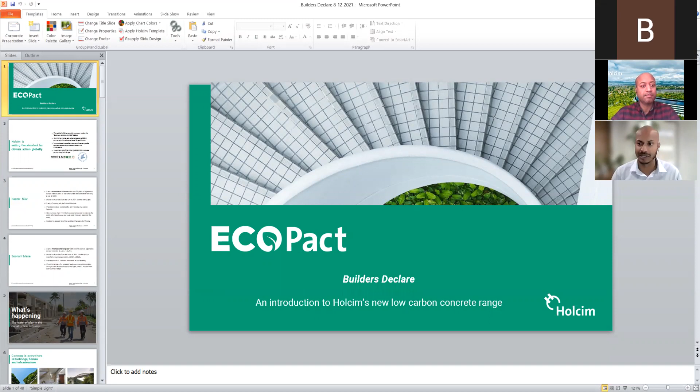Thank you very much, Hamish, for that. And thanks everyone for taking the time to join me today and Sushant in presenting ECO Pact and the offerings that we can present through ECO Pact at Holcim. Without further ado, I would like to give a quick summary of what Holcim stands for.

Holcim is the first global building materials company in the world to pledge to the 1.5 degree reduction, or committing towards that, as well as achieving net zero emissions by 2050. How we achieve this, we are targeting this through science and data-driven initiatives, which are verified and certified as well, so that we can peg ourselves and work towards achieving this net zero ambition that we have. Holcim has also invested over 160 million Swiss francs towards this, which is equivalent to $220 million so far, to reduce our carbon footprint in Europe.

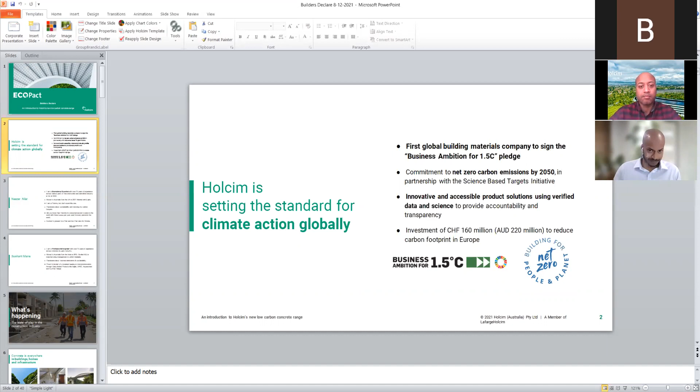Well, I'd like to give you a quick introduction about myself. I am actually a biomaterial scientist. I qualified with my degree in London from Queen Mary University. I migrated to Australia in 2007, and ever since I migrated here to Australia, could never break into that market. And I was fortunate to get into the civil construction industry.

I've got over 15 years of experience in various different roles in demolition and the construction industry, from concrete to quarries. I'm married with 2 little girls. I am a Pommy, but don't sound anything like it. Very passionate about sustainability and reducing my personal footprint as well.

As I mentioned, I've got 2 little girls, and it saddens me at the state that we're in and what we're heading towards. So working for a company like Holcim really does invigorate me, knowing that I'm doing everything I can to push this and try and get everyone on board and do our parts in every little way that we all can to contribute towards this.

And as Hamish has alluded to earlier, 3 tons of concrete are consumed per person on average, and it's only second to water globally. So that puts into perspective how much concrete is consumed, and hence why I'm very excited to talk to you about EcoPact and EcoPact ZERO and the offerings that we have available for you right now in Victoria.

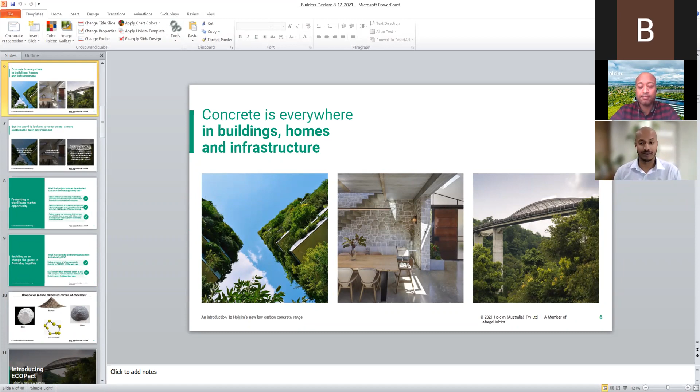So what's happening, the state of play within the construction industry? We know concrete is everywhere. It's a beautiful material to play with. There's so many things that can be done with it. It's such a versatile product. But at the same time, there are lots of different things that are coming into play with regards to how we are looking at making concrete sustainable.

Green Star is looking at targeting and reducing the carbon footprint by 40% in 2030. There's a new standard that will be coming out called Green Star Homes, and all the various state departments from New South Wales to WA, VicRoads, Main Roads in Queensland, they all have their own standards and work methodologies that they try and support financially to incentivize people to be more sustainable and more conscious in how they go about building infrastructure and so forth.

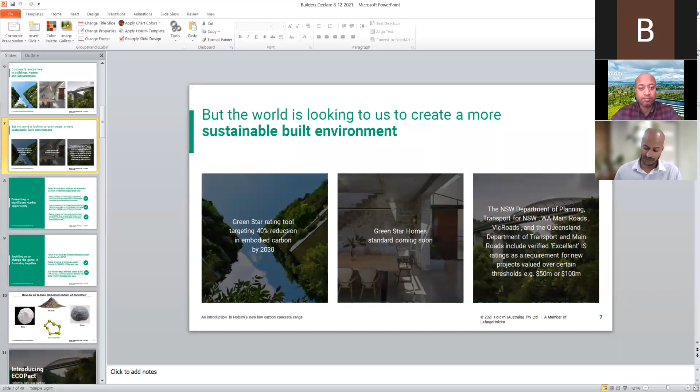I wanted to give you a bit of context with regards to how much carbon we can actually reduce by reducing the embodied carbon in concrete. Concrete is a very carbon intensive product. We know that from all the GP Portland cement that is consumed within the concrete matrix. So to give you some examples, if we were to reduce the embodied carbon by 60% in an average house slab, that equates to about 15 tons of carbon. That's equivalent to a household's carbon emissions for close to 2 years.

To put it into a different perspective, in an infrastructure project with about 150,000 cubic meters of concrete, if the embodied carbon was reduced by 60%, we're looking at about 44,000 tons of carbon that is removed, or the equivalent of 23,000 cars off the road for a year.

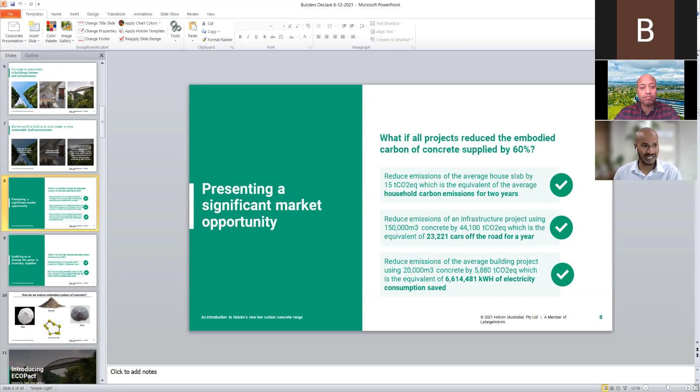The same could be said for something like an average build of 20,000 cubic meters of concrete. If the embodied carbon was reduced by 60%, we're looking at about 6 million kilowatt hours of electricity saved in terms of carbon emissions, which equates to about 5,800 tons of carbon. So as you can see, these all stack up pretty quickly, and hence why I'm very excited to talk to you about what EcoPact offers.

In Australia, if all the concrete that's consumed is reduced, that we actually take a stand and reduce the embodied carbon by 60%, that's close to 8 million tons of carbon that we could remove or reduce per year. EcoPact can reduce the embodied carbon between 30 to 60% compared to the Australian National Life Cycle Inventory database.

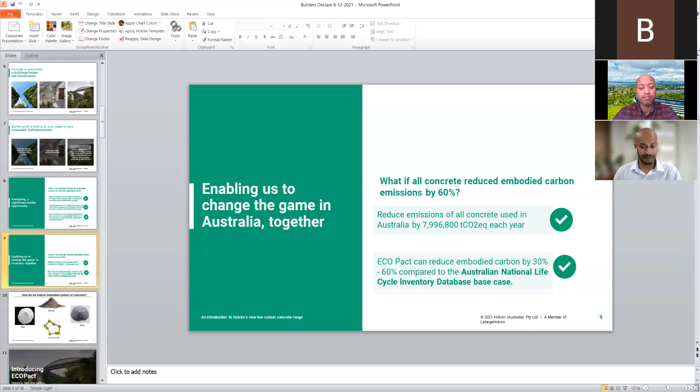So it's all backed by science and all by third parties to make sure that what we do present to you and the concrete that is supplied is verified and accredited by third parties to ensure that what you get actually has the lowest carbon possible, and it is all certified and above board.

So I'd like to take you guys through some elementary topics with regards to how we go about reducing the carbon footprint. Typically, most concrete has Portland cement, which is very intense in carbon. We can add different byproducts or waste products from different industries into concrete to try and mitigate the amount of Portland cement that's actually used to achieve a strength grade or performance.

We've got quite a few different materials here in front of us. I'll start off with fly ash. Fly ash is a byproduct from the coal power stations. When it's used within concrete, it can be taken as high as 35% replacement of Portland cement. And it's a good way of using a byproduct from a different industry and thereby reduce the actual cement content by using something like fly ash.

You've got things like slag, which is a byproduct from steel mills, which would further be used as a replacement for Portland cement. And you've got finally silica fume, which is from ferrous metals and from computer chips. You can use these waste byproducts either on their own as a standalone, or you could actually use it as a combination across all three.

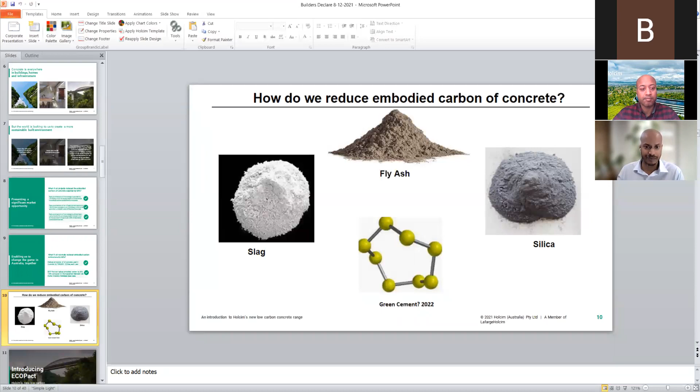So let's get into what EcoPact is about. To begin with, EcoPact is all about reducing the carbon footprint, and we have two different offerings of EcoPact. To begin with, EcoPact starts whereby we look at the embodied carbon within a concrete strength grade, and we want to reduce that embodied carbon by 30 to 60%. So for whatever strength grade we're looking at, 20 MPa all the way up to, I believe it's 60 or 80 MPa, we want to achieve a reduction in embodied carbon between 30 and 60%.

Now, what we do offer with EcoPact ZERO is where we reduce the carbon as low as possible physically without compromising on the physical properties that we want with concrete that we all are familiar with and that we all like to use. The remaining carbon we can offset through Climate Active carbon offsets and thereby achieve carbon neutrality. I'll go into a bit more detail regarding Climate Active and how these carbon offsets work, but take it for now that EcoPact would provide us with an option without being commercially unviable, whereby we can achieve carbon neutral concrete.

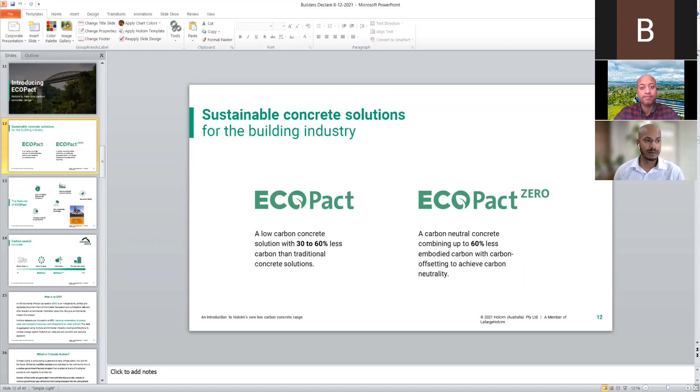So the features of EcoPact that we do provide is that it gives you guys the ability to align with the global direction that we have. We've all seen how COP26 turned out, people making pledges to try and reduce the carbon footprint. Holcim was one of the only construction material companies at COP26 pushing for ambitious targets. As I stated earlier in one of the first slides, we're the only construction company globally that has actually committed to net zero by 2050.

We want people to take this on board. So we are very passionate about EcoPact and we want to align with that global direction. By using EcoPact, you gain a competitive advantage. You have the option of going carbon neutral, and they all do come with EPDs, environmental product declarations, which help us enable and quantify how much carbon there is within a cubic meter of concrete.

As I indicated earlier, you take your standard concrete, you add byproducts, waste streams such as fly ash, slag, silica fume, and this next generation of green cementitious material, and we reduce that carbon footprint as low as possible. Once we get that as low as possible, the remaining carbon that's entrained within the concrete, we can offer carbon offsets that are accredited through Climate Active to achieve that carbon neutrality without any loss in performance.

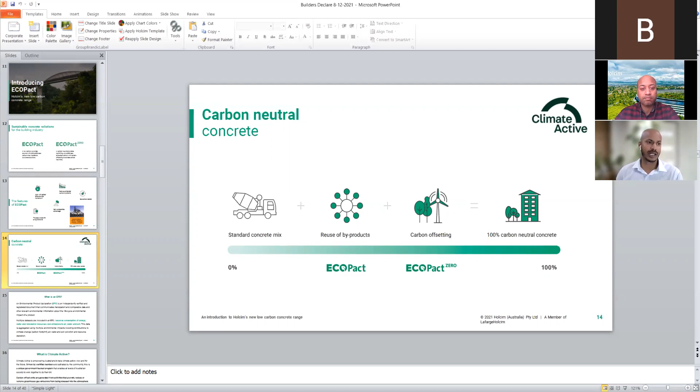What is an EPD? Some of these terms are quite new to some of us. It was new to me when I started back in the business recently. So an EPD is an independently verified and registered document that communicates and is transparent, and it gives us a view as to the life cycle environmental impacts of the products.

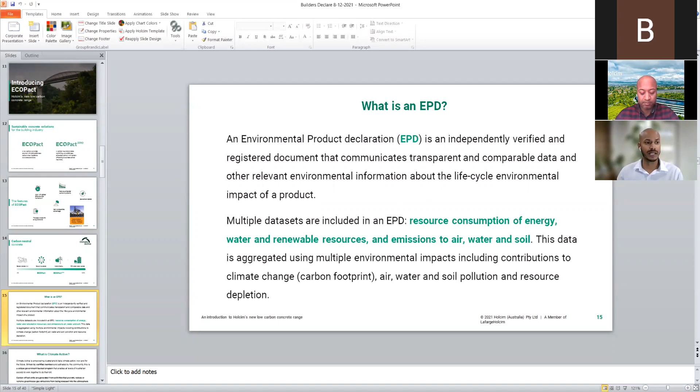Things that they look at are the consumption of energy in the process of making a product, water, renewable sources, emissions to air, water, and soil. It's all integrated together, and it helps us understand exactly what the carbon footprint is for the entire life cycle of a product that's been offered and certified by an EPD.

Climate Active. So as I alluded to earlier, once we take EcoPact and reduce our carbon footprint as low as possible, we've partnered with Climate Active to oversee the carbon offsets that we do provide for EcoPact ZERO. Thereby, we can guarantee that any remaining carbon that we have within our concrete is offset through Climate Active.

So the carbon offsets are generated from activities that prevent, reduce, and remove greenhouse gas emissions from being released into the environment. When these offsets are purchased by an organization that equals the emissions produced, thereby resulting in a carbon neutral product. Climate Active certification is one of the most rigorous in the world. So by partnering with someone such as Climate Active, we gain credibility with regards to the products that we do offer you, and it enables us to be confident in what we do propose to the market.

Well, we like to take the opportunity to make these challenges that we face with regards to sustainability and use that as an opportunity to differentiate ourselves from competitors. It helps people that take these products on to be able to further boost your sustainability credentials. It provides you guys with the opportunity to provide sustainable solutions in your tendering processes.

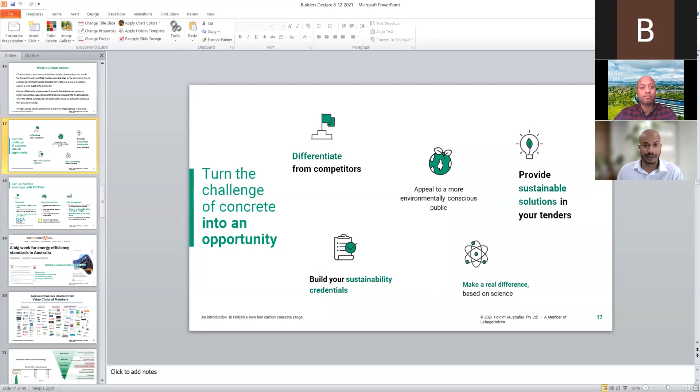And these are backed by science and by authorities such as Climate Active. So they are credible, and it makes a real difference in how we go about doing the best we can to achieve this carbon neutral target of 2050. Using EcoPact gives you an advantage. So this slide is more a summary of what I've just discussed previously. It is an innovative solution in your tendering process, makes your marketing stand out. So you would have the opportunity to stand up above and differentiate yourself from your competitors.

It is an Australian first. So 2-3 years back, Holcim launched an EPD into concrete, whereby we could quantify how much carbon there is within a cubic meter of concrete. It was the first in Australia, and we've just taken it one step further by branding it as EcoPact and then offering EcoPact ZERO with Climate Active carbon offsets.

We will then thereby be able to achieve carbon neutral goals and targets. They are going to get recognized by Green Star and ISCA, and as more and more people start talking this language, it will get picked up more frequently. And we hope that this is going to be a trend, and a trend to stay, as well as a trend for people to jump on board with and have further acceptance across the markets.

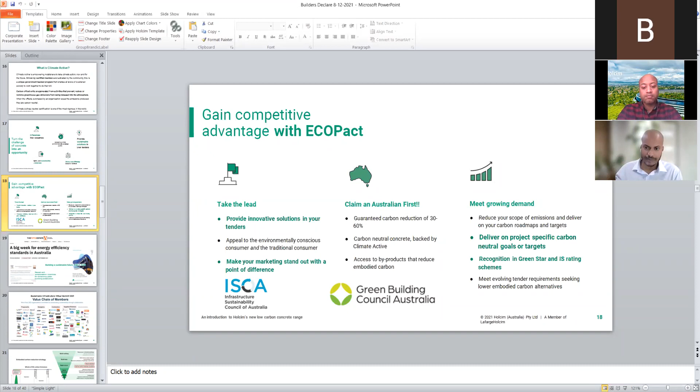These are a couple of quick snippets of things that I've seen recently. So this article was talking about the energy efficiency standards in Australia. And this is a document that I just picked up off the internet as early as August 2021. There's an actual Building a Sustainable Future by Green Building Council of Australia.

I would advise and encourage everyone here to actually take the time to read this hefty document, because it'll detail ways, whether that be products or services, that you guys can take on board to help differentiate yourself and be more sustainable in your offerings and the tender process that you guys can take.

And the last picture here is looking at actual academic studies done, whereby it shows that being sustainable is not necessarily detrimental from an economical perspective, but it actually can create more jobs. There's more commercial reward by being more sustainable in the long run.

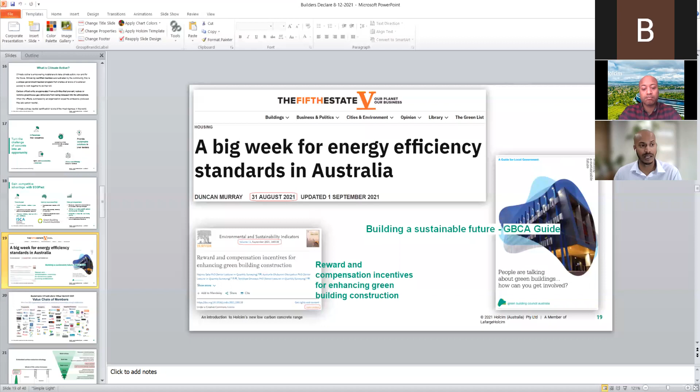So there is a lot of noise out there saying being more sustainable can actually be detrimental to us economically. But there's a growing amount of information out there which shows that being sustainable is the way forward, and it actually helps generate more income, more jobs, and it is a more sustainable way to live moving forward.

Recently, Holcim actually was invited to the Sustainable Infrastructure Summit. It was unfortunately a virtual summit due to the COVID environment that we're in. But what was very pleasing was the huge number of people on board with trying to drive a sustainable outcome. We got people such as Melbourne Water, South Australia Water, MRPV projects, all these different bodies and authorities that are calling for sustainable goals and targets.

And then you've got designers that are actually jumping on board and supporting this. And you've got contractors such as CPB, Downer, Acciona, BMD, that actually want to jump on board and support the whole value chain all the way through. And you've got suppliers such as ourselves, and others in the market for various other products and offerings, that are also turning that page and seeing the light at the end of the tunnel, that sustainability is a way that we should all be focusing.

So what was really encouraging by being at this summit was that it wasn't just us talking about it. The whole value chain and the key stakeholders in driving such a change are all working in the same direction. So having this opportunity to talk to you guys about this EcoPact offering and the sustainability goals that Holcim has is perfect, because it's going around a whole circle, and it just makes it much easier, and I hope it becomes mainstream and more accepted as we move into the next year and so forth.

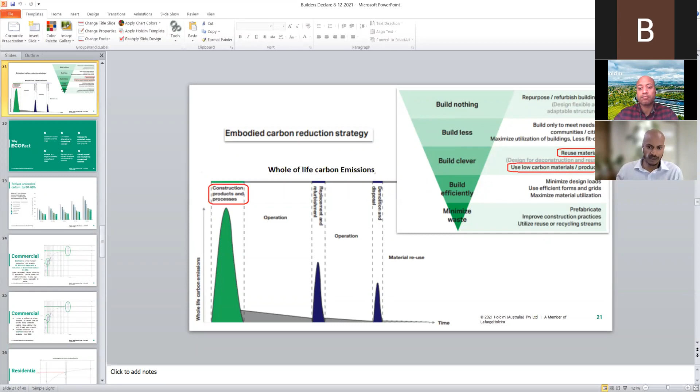So in summary, EcoPact that we offer is low carbon concrete. It's actually available in a large variety of concrete offerings, from 20 MPa all the way up to 80 MPa. We can do curb out of this, we can do footpaths, we can do various types of slumps, all the way from 80 slump or 10 mil slump, all the way up to super workable concrete. So there's actually no limitation.

I would encourage you to follow up and chase myself or Shashank and challenge us to actually design what others would consider impossible, because both of us are very passionate about innovation and sustainable outcomes. So I would encourage you guys to pick up the phone, email myself, or give me a call and ask what we can do, because EcoPact is available in a large variety of strength grades, and I'm very confident we can find products for you that would fit the purpose for whatever job site you have.

What else is there? It is very similar to conventional concrete, and very importantly, it pumps, places, and finishes as normal conventional concrete. So we're very mindful of the fact that we don't want to change the goalpost too much, whereby we offer a product that reduces carbon, but no one adopts it because everyone has to re-educate themselves on using a product that everyone's familiar with. We know the industry is typically very slow to move and take up innovation.

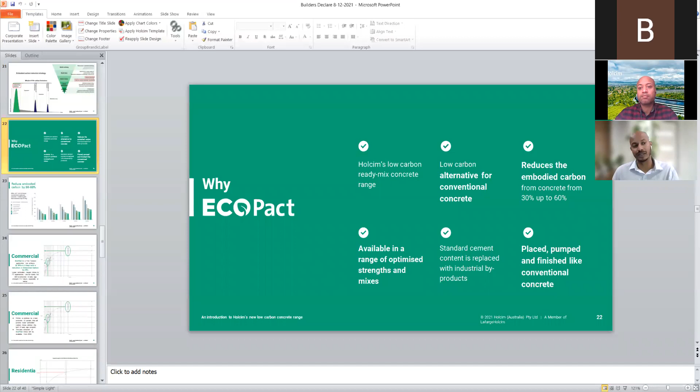Now, I've got some nice graphs here, a bit of technical information. I'm sure some of you would like these graphs, and some of you would wish I moved on, but just for the purposes of communicating to everyone, the graph in front of us looks at five different grade strengths of concrete, all the way from 20 MPa up to 50 MPa. The vertical axis looks at the greenhouse gas emissions per cubic meter of concrete.

The gray bars per strength grade look at the typical life cycle analysis of how much carbon we would have per cubic meter of concrete. So you can see how, by adding elements such as fly ash, slag, or even a ternary blend, we reduce that carbon footprint as low as possible.

EcoPact takes that, and using our internal science and our experience with sustainable concrete, we've taken that even further. Once that embodied carbon is reduced as much as possible, within that 30 to 60% depending on the strength grade and application, for any remaining carbon we partner with Climate Active and provide carbon offsets to take it down to zero.

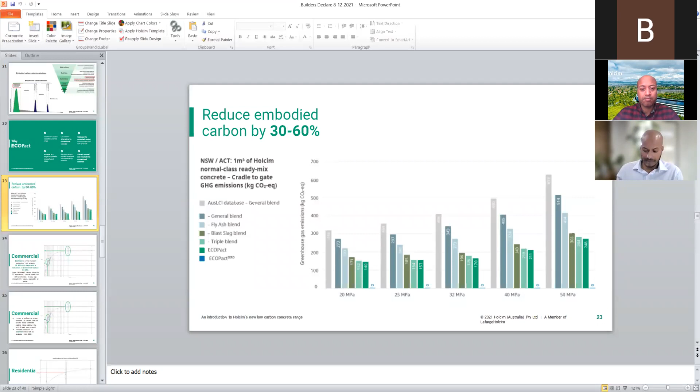Typically, when we look at low carbon concrete, the biggest hindrance that we have is early age strength. Some of you may be familiar with what post-tension concrete is, some of you may not be, but just to make it easy for everyone, post-tension slabs have certain requirements. They need a certain strength at 28 days, which is 40 or 50 MPa typically.

But they also need to be able to be tensioned, so that you end up squashing the concrete through the steel reinforcement that's within it. The steel reinforcement is jacked up typically at 4 or 5 days. And the concrete needs to achieve a certain strength so that in the process of jacking up the steel reinforcement, none of it rips out. Typically, what is called for in the market is 22 MPa at 4 days or 3 days.

It depends on the schedule of what's required. Some schedules call for 2 days, some 3, and so forth. I'm pleased to announce that with EcoPact, Shashank and I have, more so Shashank, he's done a lot of work behind this, and he's very confident that we can actually achieve 22 MPa in 4 days by also reducing our embodied carbon by 35%.

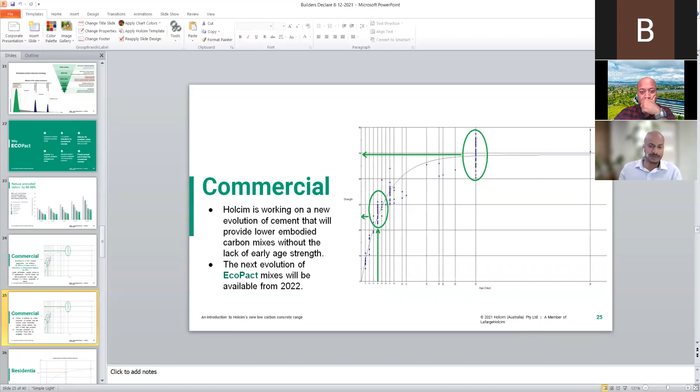Typically, with options that we can add into concrete to try and reduce the embodied carbon, fly ash is the least reactive of the two elements that we can add to reduce the carbon footprint. When we do add fly ash into the mix, being an EcoPact offering, we need to add a significant amount of fly ash. This results in the strength growth not being as superior as we would like it to be. Fly ash and GP are combinations that are more common in Victoria than GP, fly ash, and slag.

The reason I brought this graph up is to try and show you what we can achieve and some of the limitations that we work around. Typically, concrete strength is guaranteed at 28 days. This is something most people are familiar with, whether it be 20 MPa at 28 days or 40 MPa at 28 days. As soon as we make EcoPact with a binary blend, which is GP and fly ash, and we push that fly ash percentage as high as possible, so it falls within the window of what EcoPact is, and reduce that embodied carbon between that 30 and 60%.

What ends up happening is we can't guarantee that 28-day strength at 28 days. But looking at the data, we can see that the target strength of 20 MPa or 32 MPa, 25 or 50 MPa, we typically achieve that at 29 days, 30 days, 31 days. But from a reporting perspective, as a supplier providing concrete to the market, we are held to certain standards. So it calls for, is your concrete 28-day strength? If it's not, you are forced to call it 56-day strength. So Shashank, did you want to add to this?

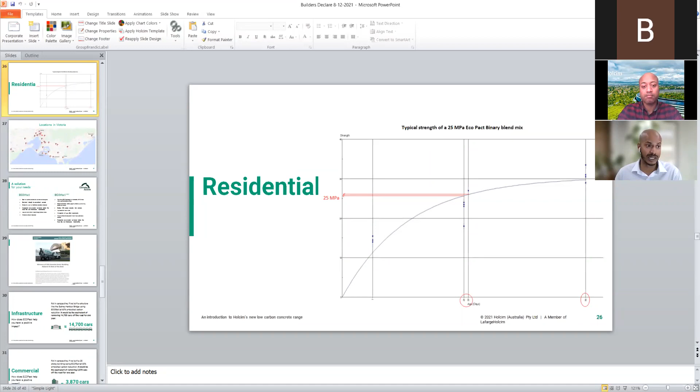So the reason I put this up is I know some of you I have spoken to in person when I've been in Gippsland. I've been looking forward to this presentation. I hope there are other people in the far west and far north. I just want you to know that wherever your jobs are, I'm pretty confident that Holcim can provide you EcoPact concrete and help you achieve some of these sustainability goals that everyone here is trying to target.

So in summary, EcoPact comes with the lowest carbon we can physically get it down to. It reduces the embodied carbon between 30 and 60%, and we provide equivalent strength to conventional concrete. It's recognized and rewarded by industry bodies such as Green Star and Infrastructure Sustainability. There's less environmental impact, and it helps conserve our natural resources.

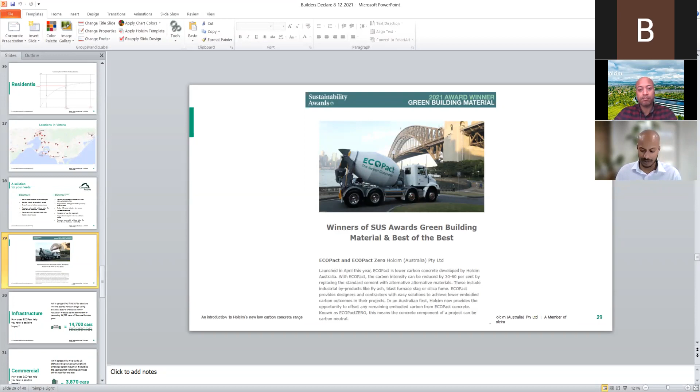So it's great pleasure to be recognized for some of the work that Holcim's put in, and taking that plunge to actually do something that no one else is doing and taking that risk on, because we firmly believe that this is the way forward and this is how everyone should be working towards sustainable goals. The next couple of slides are very light. They would work through things such as understanding the context in terms of quantifying carbon.

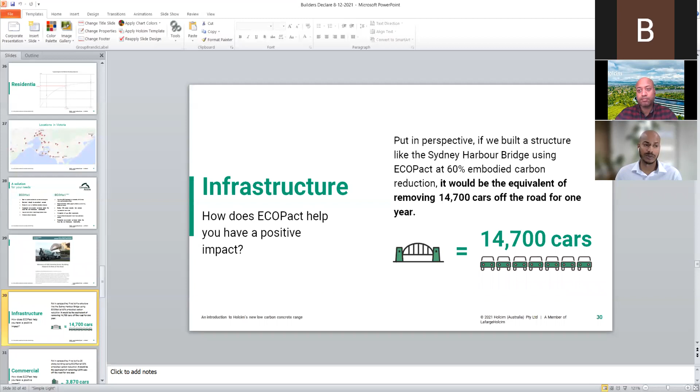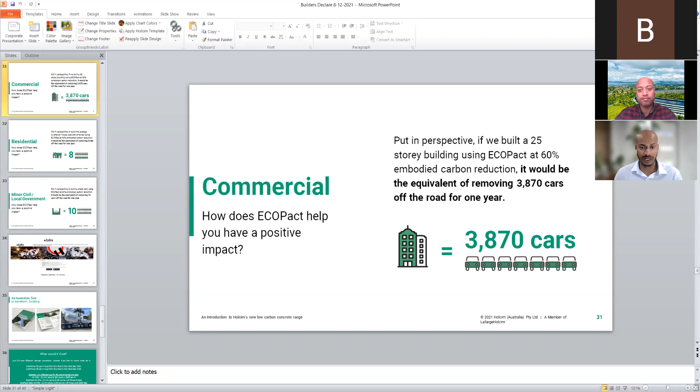So say, for example, the Sydney Harbour Bridge, if all the concrete within that was reduced by 60%, that would be the equivalent of about 15,000 cars off the road for 1 year. The next, we have a commercial building, 25 stories. If you achieve 60% reduction in embodied carbon, that's close to 4,000 cars off the road. And mind you, this is 60% reduction. We're not talking about 100% reduction with EcoPact ZERO. So you can see how this stacks up pretty quickly.

We take a typical house slab and we take that to 60% reduction in embodied carbon. That's the equivalent of removing 8 cars off the road for 1 year. Minor civil jobs such as a skate park, if that was reduced by 60%, that's the equivalent of removing 10 cars off the road for 1 year.

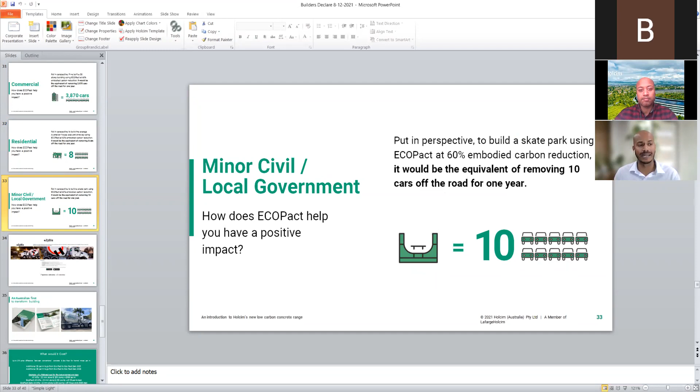Holcim, as I alluded to earlier, is very dedicated to moving forward in this space. We want to do this in not just our products, but also in terms of how we operate as a business. Holcim's launched something called EasyBiz. So what this means is we are able to provide you dockets for the deliveries of concrete paperless, whereby we partnered with Google Play and Apple Store and created an app called EasyBiz. Using this app, you can very easily track the movements of your orders.

You can find out in real time how far your truck is from your job site. You could use it to actually go backwards and find delivery dockets. You can use it for invoicing purposes, and it's available 24/7. So we're trying to move away from the convention of providing paper dockets with each of our deliveries, and we employ people to take this up, because this is another step towards us at Holcim achieving carbon neutrality.

In addition to this, most of the company cars that are presented to the salespeople are hybrid in nature, thereby further reducing that carbon footprint. I know that in Switzerland, Holcim has pushed an electric concrete agitator truck. I would love to see that come across here in Australia, but these are some of the initiatives that Holcim's taking, being a leader to be the first to move in some of these applications.

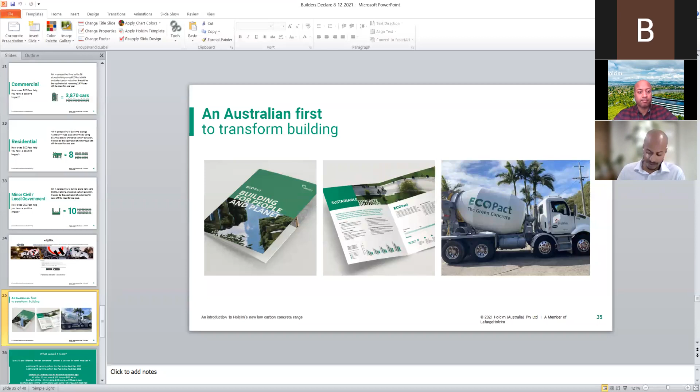So what do you get with ECOPact? You get embodied carbon reduced by between 30 and 60%. And also you get an EPD with that concrete.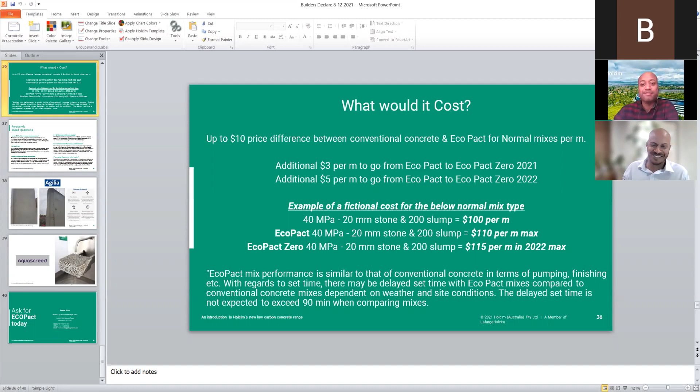Shashank, did you want to add anything further to that? No, look, there has been some chat, and I'm actually answering some of the questions in the chat box as well in the meantime. So okay, good stuff. I've been ignoring that for a bit. So good stuff, Shashank. All right, these are just some questions that I had. I'm sure you guys would have more questions to go through, so I'm not going to go through some of these. And Shashank's been doing a brilliant job with this.

Shashank alluded to a couple of value-added products that we have. There's a big product called Agilia that really got me excited. And this is a product that I helped launch a couple of years back with the help of Shashank in Victoria and South Australia. This concrete scares concreters. The reason I say it scares concreters is, we all know how concreters love concrete to be wet. Well, this is so wet that they look at it and go, this is wrong. It shouldn't exist. But it does, and it provides beautiful finishes.

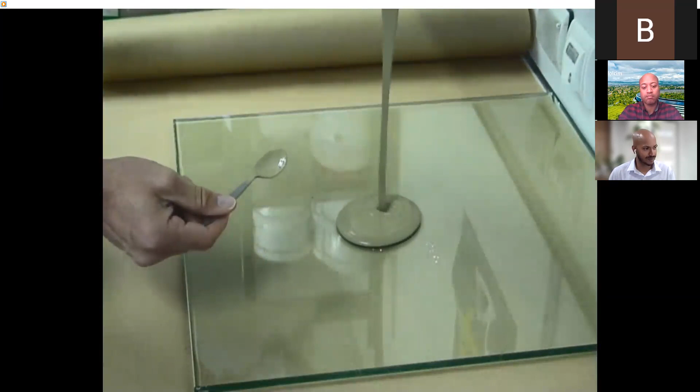But as I mentioned earlier, Agilia is all about the matrix of different materials rolling on top of each other and creating a fluid nature itself, not relying on admixtures to actually achieve that. This is the science behind Agilia. It creates a fluid concrete without the requirement of using excessive amounts of admixtures.

Okay, I'm also going to show you an actual live. Can you see this, Srisan?

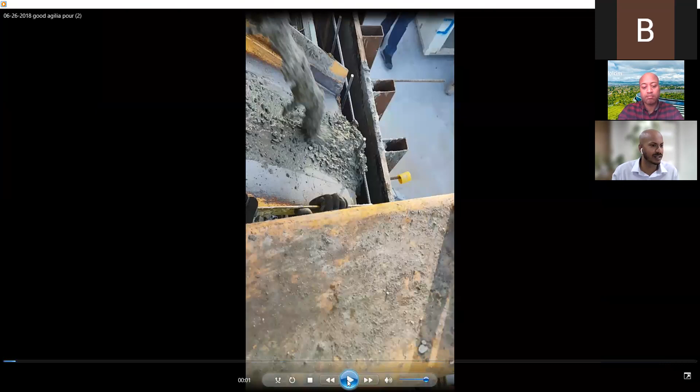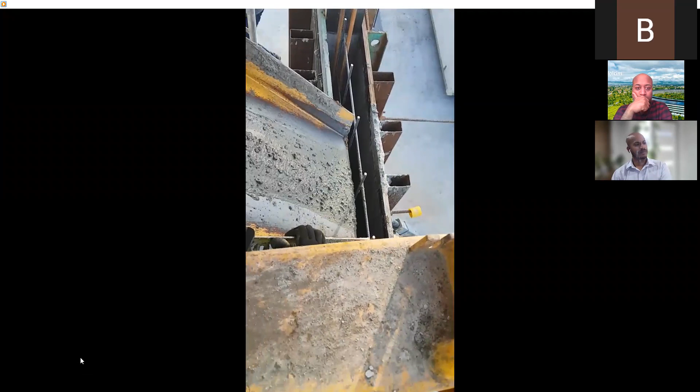Yep, okay. So this is an actual vertical element being poured using a kibble. It's one of the account managers standing there at the bottom while I'm dangling there at 2-3 meters above the ground. Just going to fast forward this video a bit. So this column here typically took 3 people close to 10 minutes to pour. The length of this video is just over 3 minutes.

But what we can see is there's no vibration required. They're just placing it in. And you could very quickly start to see the concrete inherently from within the element start to rise up. It's pretty level across the whole surface. You just about start to see the concrete element itself. So it encapsulates all the reinforcement, as Srisan alluded to earlier, and it eliminates any requirement for vibration.

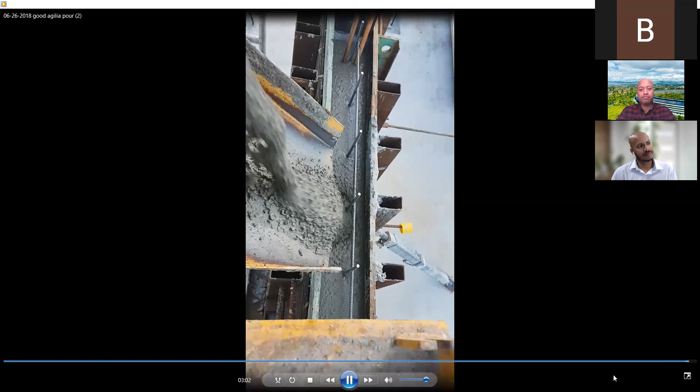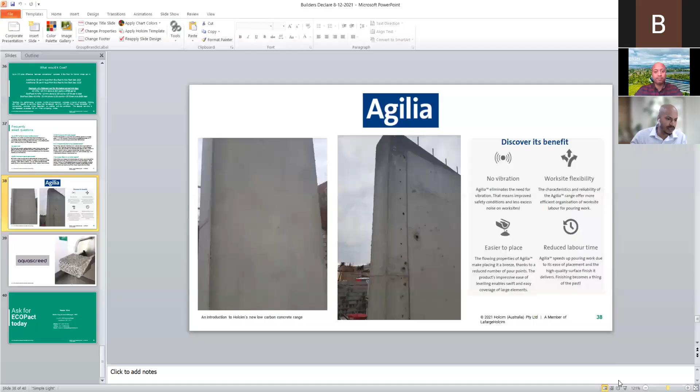And finally, we've got another product that Shashank and I are working on into the future called Aquascreed. This will be typically 20 up to 32 MPa possibly, and it's designed around permeable concrete. This potentially has opportunities on the sustainability front as ways of mitigating or conserving water within a job site and preventing it running off away from a job site, further adding to some of your green credentials.